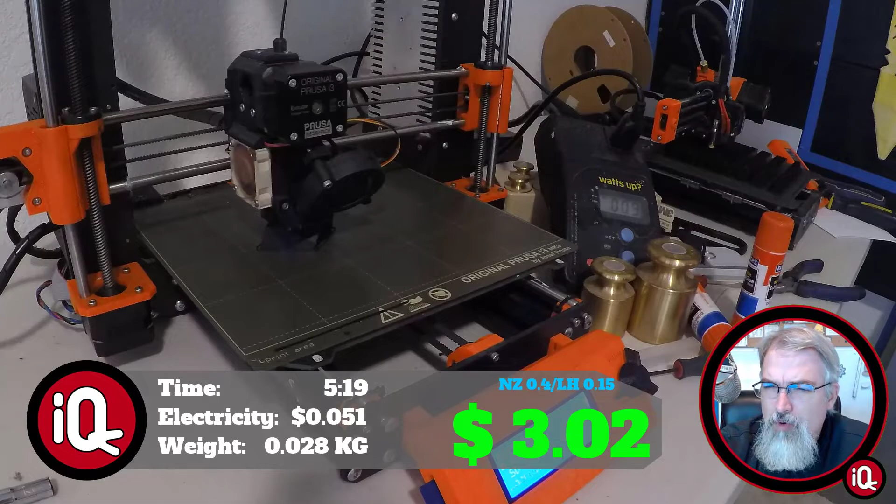So, this guy takes 5 hours and 19 minutes to print. It takes 5.1 cents electricity, and it weighs 0.052 kilograms, but it has a magnet in it that weighs 0.024 kilograms. So it actually weighs 0.028 kilograms worth of filament, and at $20 per kilogram, that comes out to 56 cents. But then you got to add the magnet in, which is $2.40 for the magnet, and the total comes out to $3.02.

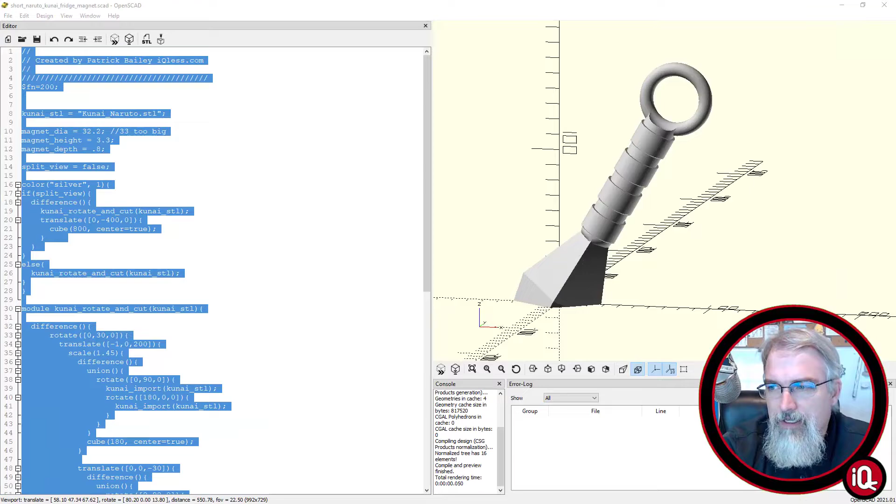So with that, let's go look at the OpenSCAD here real quick. The OpenSCAD is pulling in that file, so you need to pull that file in. So first, let me kind of show you what's going on. I'm not going to go into great detail on this. I'm working on another kunai knife, so I might do a whole video on that, recreating the more complicated one.

But here, if I go here and I import, let's re-import this guy. We'll comment that out real quick. So I'm going to leave this one up, and we'll import this one again. We'll make this color red so we can see the difference. But here's the Kunai STL file.

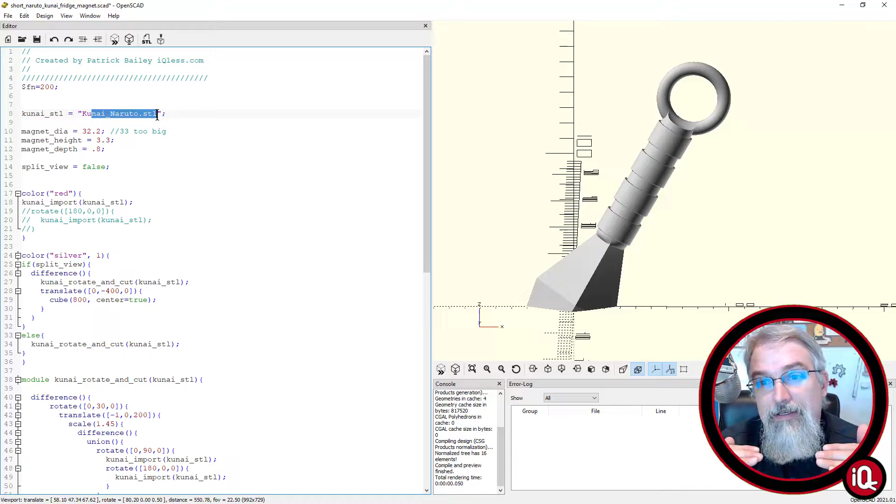I'm pulling that in, and what he did, it's only half of it, because you can't print this very well on a 3D printer at all, so he cut it in half. So the idea he had, I guess, was you print it flat, stick them together. So let's just do the one, and you can see there is the one flat image.

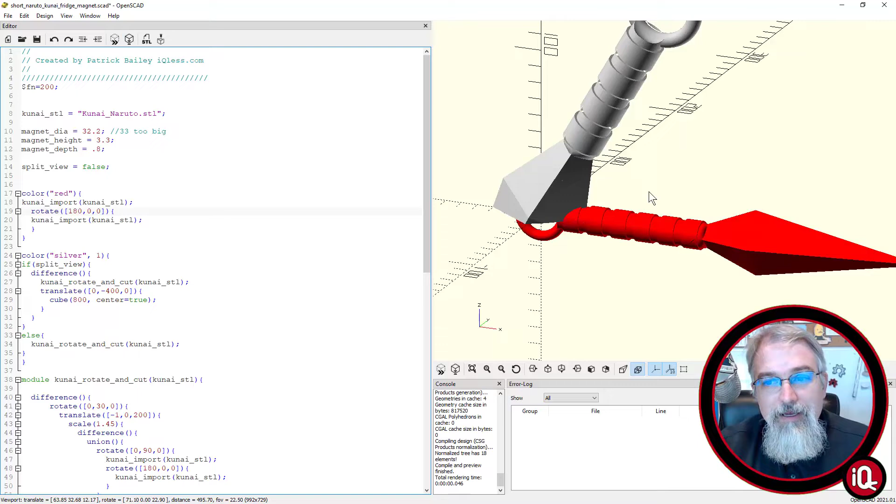Now what this file does overall, what I'll do is I'll put a second one in here. Now if I put a second one in, it's in the same location, so nothing's going to occur. But I can take that second one and rotate it 180 degrees. And then boom, I got a full kunai knife.

Now I can come over here and say union, union that guy. And then I could also take, now that I've got that, I could do a rotate.

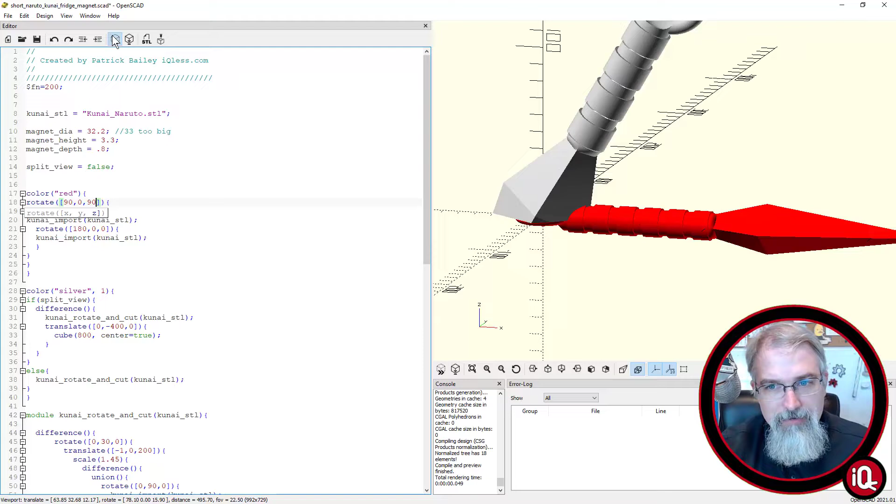And let me see. You could say 90, 0, 0. Let's see how that does. Oh, wrong way. Let's try that way. How about this way? I always foul up my rotations. There we go. So now we kind of got that up, and then we could do a translate. Translate. Boom.

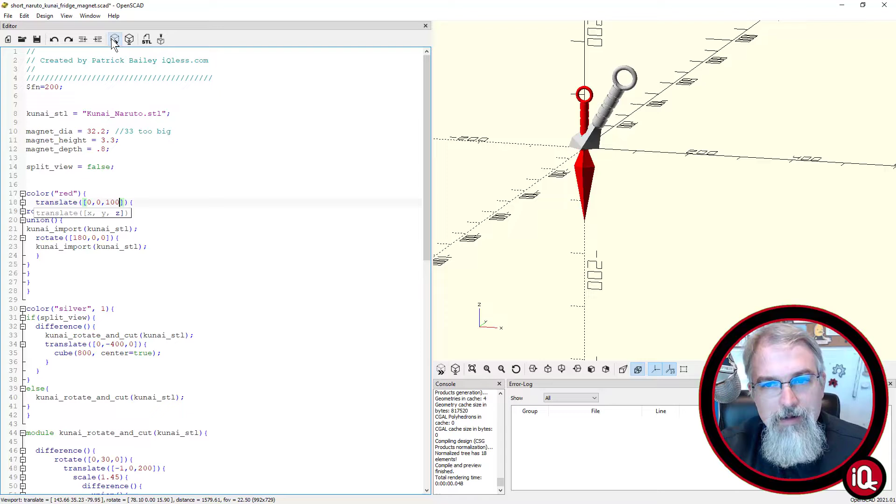And we could say, what could we do? We could say 0, 0, 100. Just pump it up. 150. There we go. Now also you'll see my knife is different size than his knife. So I also enlarged it and I rotated it.

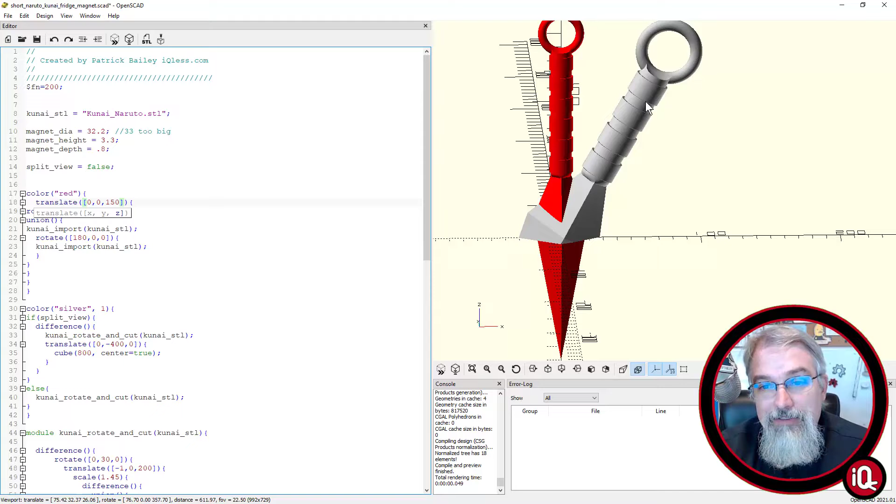And also you'll notice here I got 1, 2, 3, 4, 5, 6 rings. And over here I got 4. So what I did is I cut it and then reattached it. So there's some things I did. But you can basically see down here is where I'm putting the kunai knife, adding it, scaling it by 1.45, doing some translations on it, rotating it, and then going through here, then you make a cube on the bottom and you do a big difference on that and you cut that guy off.

And then of course we had to add that space back in for the magnet, which we do with kind of generic code that I have at other places. Now it's my generic magnet guy. And up here you can change where you want to do the magnet. So if you have a different magnet, you might want to adjust this magnet code to something thicker or smaller or different, but this guy hangs out so far that you want a strong magnet, so you don't want a wussy magnet, otherwise it's going to fall off, I think.

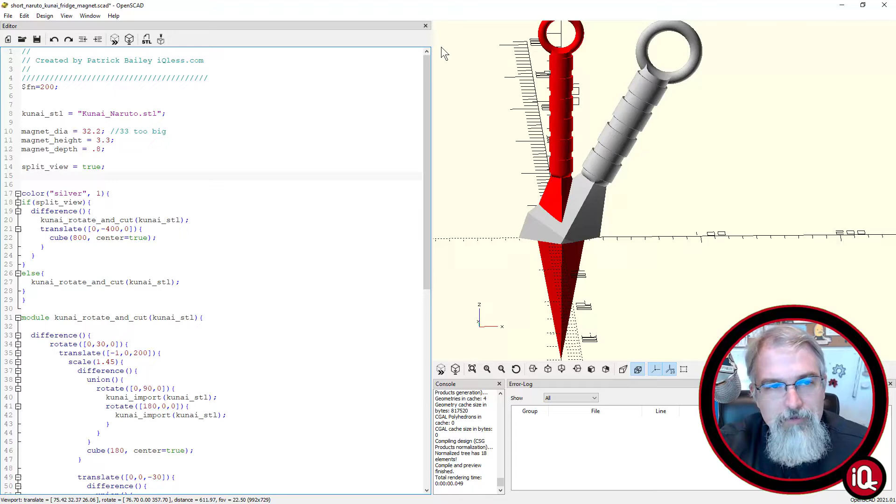But let me go wipe out those changes real quick. So you can download this, fiddle with it. And also here's a split view, so if I set this to true, and I just removed that old one, boom, I can split it in half. And the only reason I split it in half is I can see where that magnet is.

Now, if for some reason you actually want the magnet to be less powerful, but you're using the same magnet, you can move it further away. So here's that magnet depth, that 0.8. I could make it 1.8, and that's going to move it higher and make it less powerful when it gets near things. That's an option. Or if you end up buying a different magnet that has a different depth, you could change that to a 1.3 or different size. So you could tweak this based on whatever you're sticking in there.

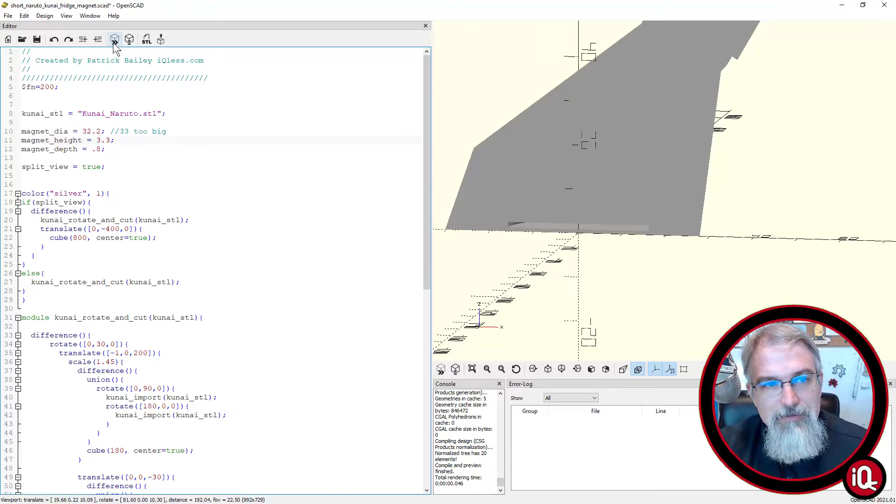But there you go. So there is the wonderful kunai knife that my daughter is all excited about. And since I gave this to her, now she wants an actual kunai knife, which I'm working on right now. I've nearly got it done, and when that gets figured out, I'll probably do another video on that. But one thing that I don't think is a problem for this fridge magnet, but would be a problem with handing my daughter a very sharp object, is that it's a very sharp object. So these angles here are kind of sharp.

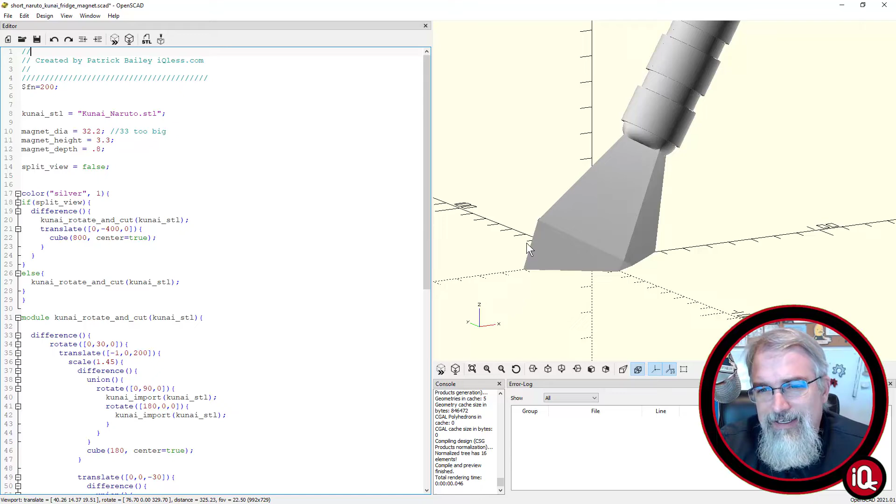Against a fridge, you're probably not going to hurt yourself, and it's plastic, but I could see that if you made a knife and you gave it to a teenage girl or teenage boy, they would start playing with it. So I figured out how to dull it on the one I'm doing, and I'll show that in another video. I think it's going to be pretty cool, but more to come, more to come.